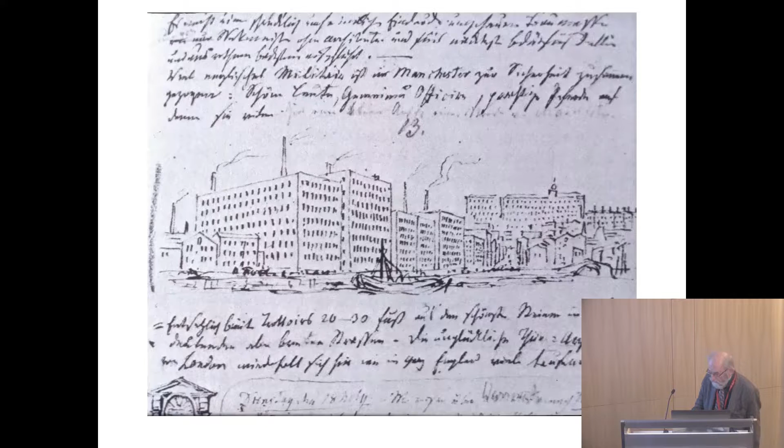Here you have the Altes Museum with this remarkable staircase, which is within the colonnade of the building, designed by Schinkel, looking out onto Lustgarten, and then beyond that, the castle, the Schloss, now being reconstructed. Over to the east is the cathedral, and behind us is the Neues Museum.

So this is the first multi-storey museum building in Europe, and it's made as a multi-storey building because the collections of the Prussian state grew so rapidly from the empire which they were able to draw on for the collections. You see here it's not a stone building, but it's a rendered building with a brick back face, and it has on the skyline the zinc sculptures which are very special to Berlin.

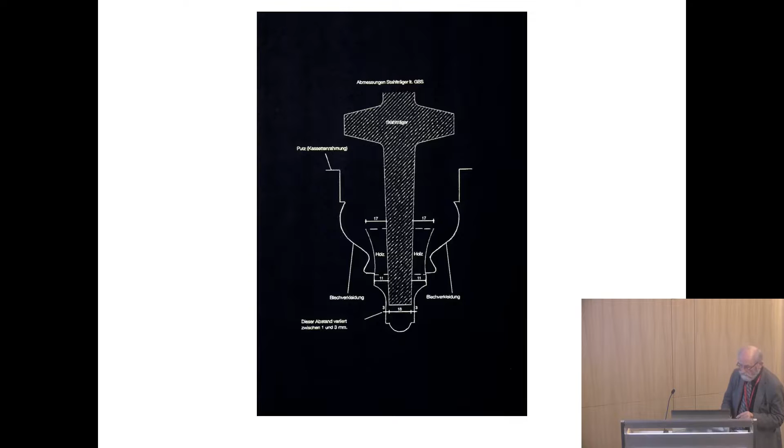This is a section through, and there you can see the simple cast iron beam with its central reinforcement and the casing around it, from which the masonry was built. At Karlsruhe University, we made some cast iron replicas. We made them from poor iron to match the original mix, and we put a carbon fibre tape underneath so that even though the beams were fractured, we could leave them in place.

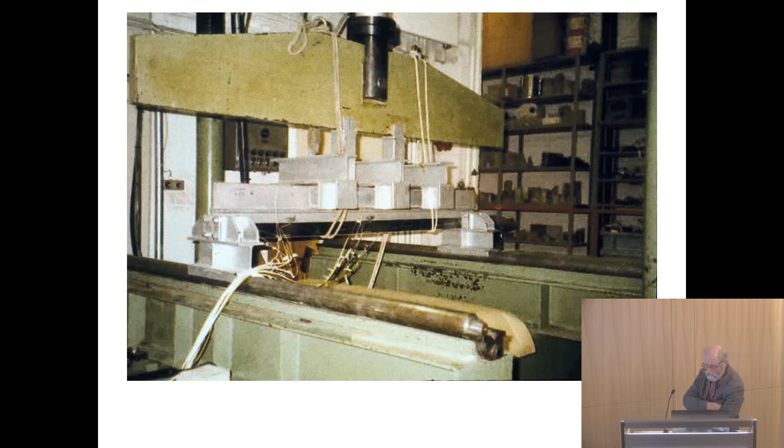The museum itself is built of domes and ceiling coffers, and it's a day-lit museum, so each one of the galleries is very narrow, side-lit, and this shows the original display of classical furniture and classical artifacts.

That is made up of these pot floors, and Schinkel and Stüler came to see Soane at the Soane Museum and went to Manchester to look at the mills there, because when they'd built the brick structure of the museum, they built it without all the floors, and it sank by about 400 millimetres into the silt of the river. They were therefore looking for this lightweight pot floor construction, and Soane was building the Bank of England at the

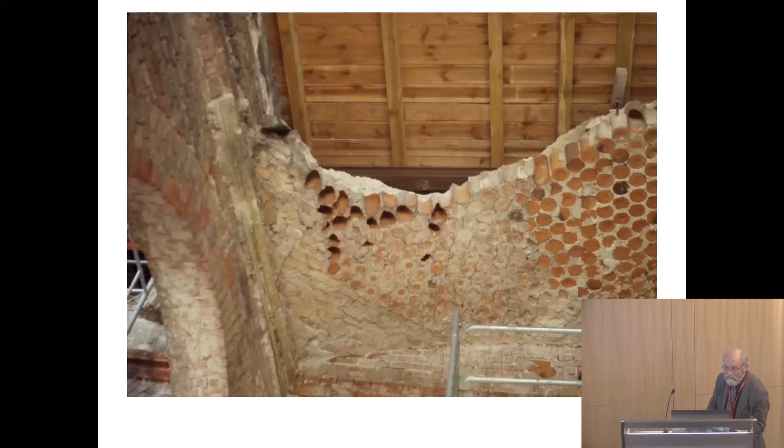same time. And we've sort of considered how we were going to justify the floor loadings to the museum, who were, well, like the Museum of London now, asking for, could we have 10 kilonewtons, please? The answer was no, you can't. We were told that these pots are totally unavailable. They're just a flower pot with an end, so they're a cylinder of clay, and they're turned on a wheel, and you raise it, and then you close the top with a lid. You then put a pinhole in to release the gas during firing.

And so I went to a potter in Petersfield, and I had 3 or 4 made, and then brought them in carrier bags to the table at the museum where everybody was sitting around, and they said it's impossible, so I put them on the table. And then suddenly there was a rethinking, and they thought, well, perhaps we could do what the Brits could do. And sure enough, 20,000 pots were made by 2 men.

We still had to say, well, we can make the pots, but can we prove that the floors can actually carry the load? So we built a test vault, and it failed at 22 kilonewtons. So we thought, well, we can provide you with 5, and that is remarkable from such a thin, aerated series of mortar and of clay. You can see in the corners you get the brick triangulation to take the compression in the corner of the vault.

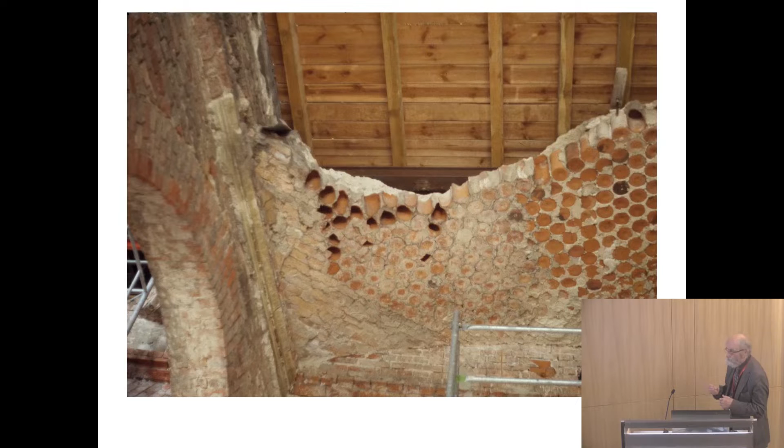The previous slide showed some of the great chambers which were within the ruin where floors had collapsed, and so we had to repair pot vaults but also renew whole floors with pot vaults, and you do it in the way the Romans did. You put up a timber frame and you lay the pots over, infill them and so on.

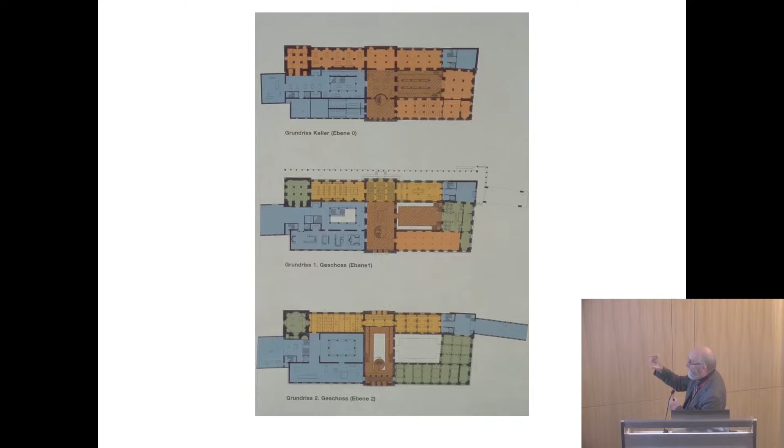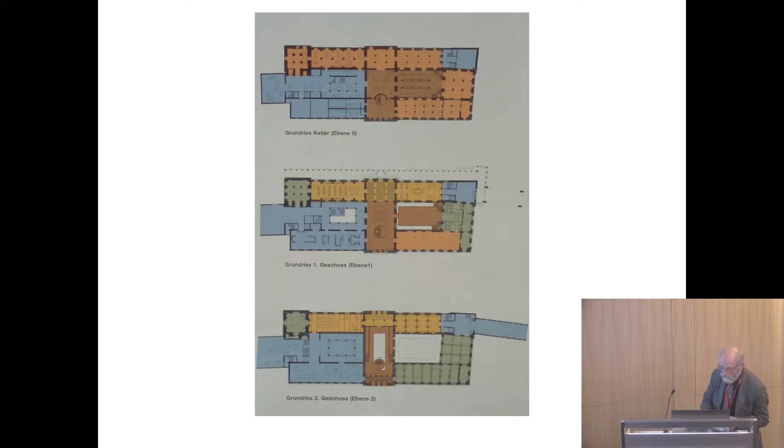This is the plan of the museum, and you can see that you have the Treppenhalle, the staircase in the centre. You then have a courtyard on east and west, and then these single aspect galleries going round. And one of the first decisions we made was that the circulation pattern of the original museum should be re-established. The Egyptian courtyard was destroyed completely on 2 sides. So on the right-hand side, the west side, and behind me on the north side, there was no wall. So re-establishing the circuit of the galleries meant reconstructing new galleries in place of the old to re-establish the courtyard.

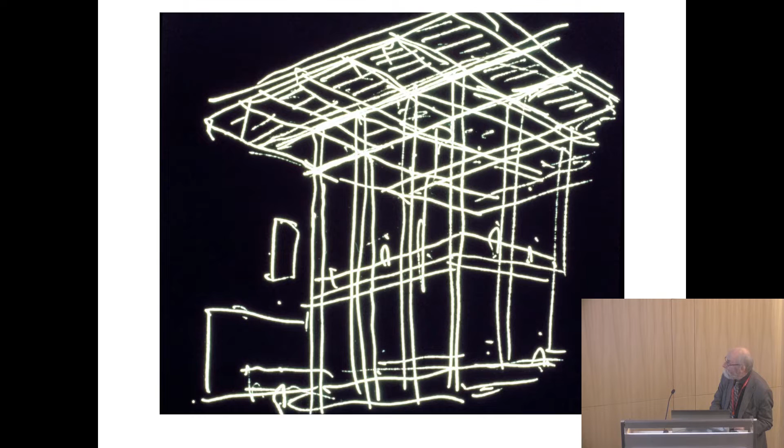And the lash-up of stabilising the building, I just wanted to touch on the fact that the shortage of materials in the GDR meant that we had, as you see, Acrow props, which are somewhat tenuous, intended to lift the load of these collars clear of the structure and not put stress on the domes. Okay, but how do you disassemble it and actually make it work properly? What I did like was this wonderful sort of timberwork. I really like the combination of timber structures supporting masonry which is in distress, rather than steel. And I would say that we underuse timber in temporary works.

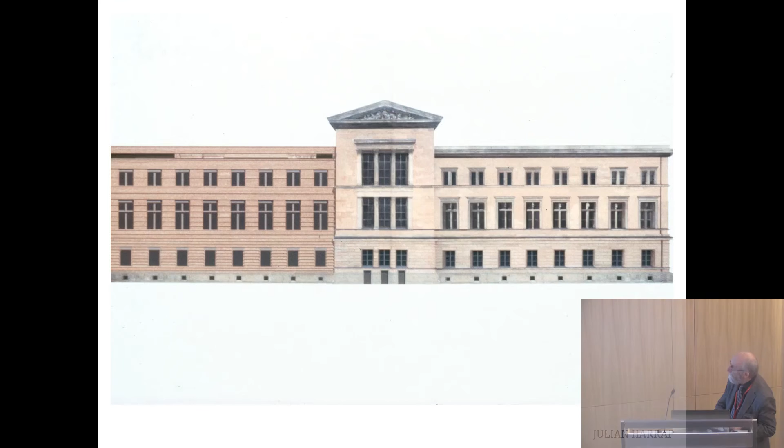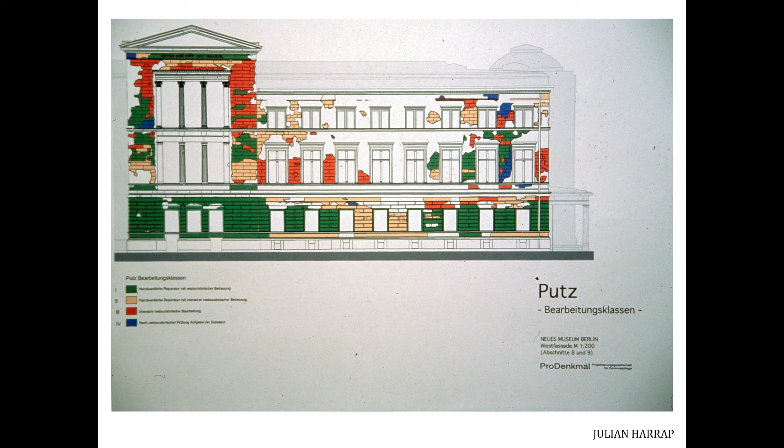Obviously the render was of various qualities, and that's the analysis which is exactly what you would anticipate. Where there was bare brickwork in the white portions, we decided that we would repair the brick, and then we used a series of slurries to actually cover it, not with a render, but it was like representing the first coat of a 3-layer render system, so that the tonal value of the surviving material and the tonal value of the brick were not in contrast, but were actually harmonized architecturally by drawing the same material together.

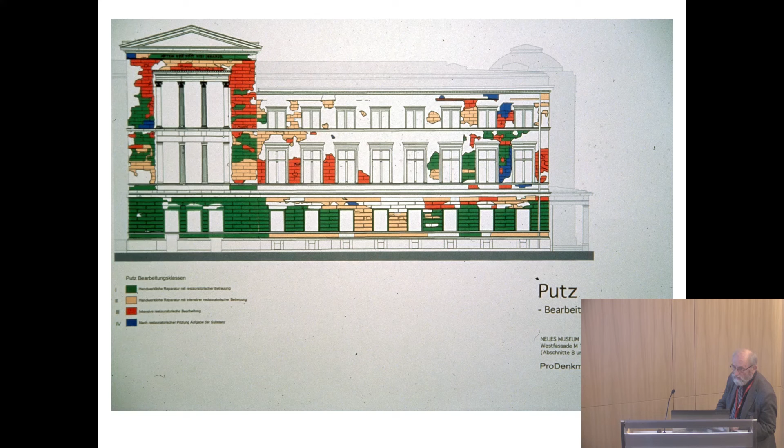And if I just show you how we did that. So this was the original material, and you can see top right and top left, bare brickwork. And so we looked at, well, how could we just take some of the patchiness and build it back into representing an architectural whole from which you could read material. And that was the means in which we established a strategy towards the repair of the surfaces of the building. It all had to be approved by about 23 people, and so it was very necessary to argue one's way through in a rational way.

The three-dimensional works of art, again, armatures clad in mortar. And extraordinary, when you're working on sculpture at that height, it has to be almost grotesquely crude in order to read at ground floor level. And so we didn't have a screen on the scaffold because the sculptor would do work and then walk to the other side of the river to see if it looked right.